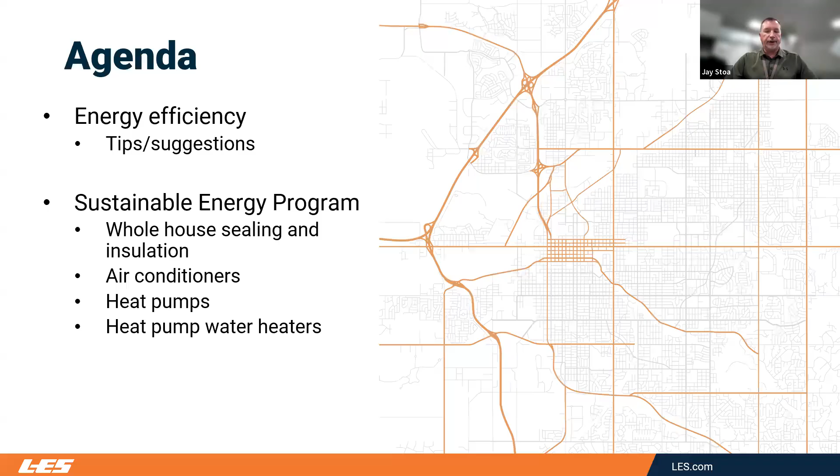Don't hesitate to ask questions as I'm going along here. We had a technology issue here, so I don't have all my notes. So hopefully I can, like we say, wing it.

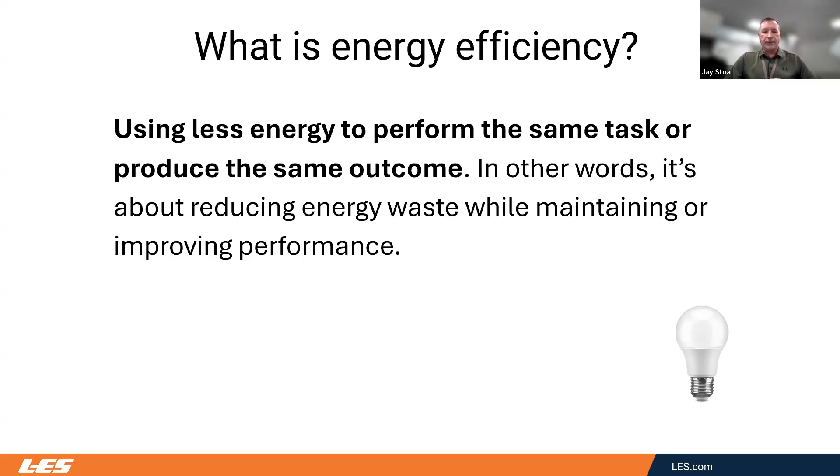So to start off, what is energy efficiency? If you use AI, this is what I got: using less energy to perform the same task or produce the same outcome. In other words, it's about reducing energy waste while maintaining or improving performance. And obviously, our sustainable energy program is going to improve some of those energy efficiencies, and you're going to get an incentive with that. So what I want to do is a quick rundown of things that I look for when I'm evaluating people's energy consumption.

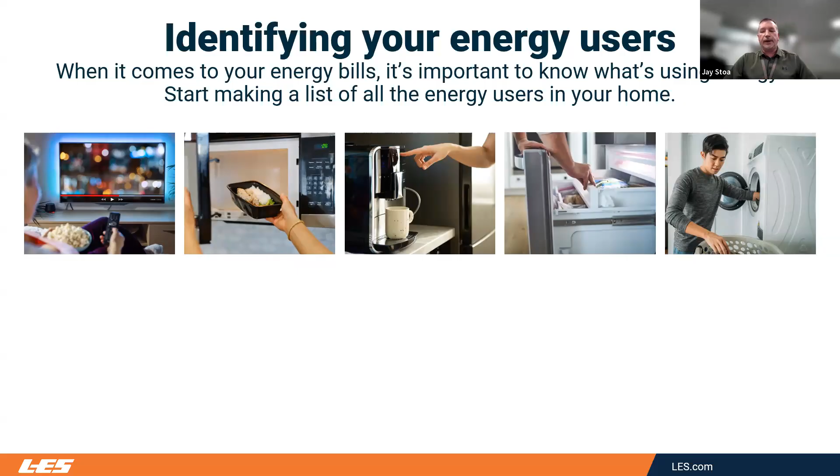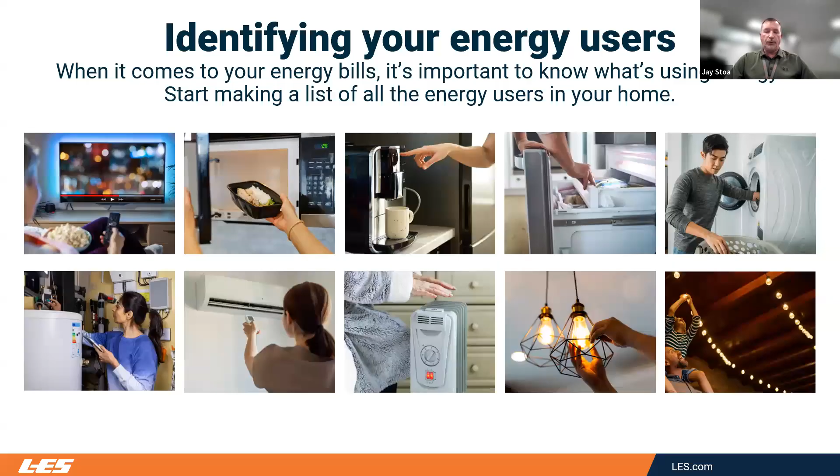So if you think about your home, you're going to have all of your plug loads, like your TVs, cable boxes, electronics, routers, your microwaves, even your task lighting. And then your appliances, refrigerators, freezers, clothes dryers, dishwashers, really everything that is using energy, your electric meter is going to be seeing it. And then, of course, you're going to have what I call your seasonal loads. Depending on if you heat with electric or, obviously, air conditioning, you're going to see that in your electric bill. And one thing I'm going to point out during this next slide is what we call seasonal plug loads.

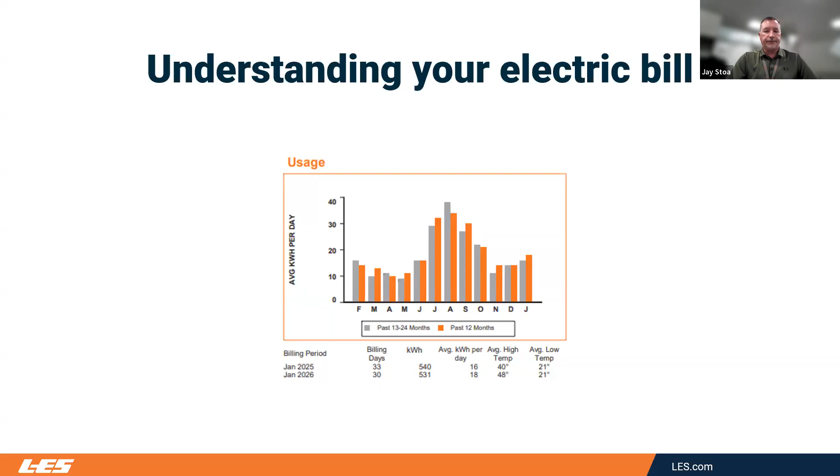So once again, what I want to look for is what I call base loading. That's going to be all your appliances, your lighting, and your plug loads. So in this graph, the months that show the lowest energy use are going to be April and May. So that's what I'm going to call the base loading for this particular customer.

And then once again, we have the seasonal. This customer has gas heat, so we're seeing that big increase during the summer months. And that's what I'm calling the seasonal increase during the summer months, because it's going to be air conditioning.

One thing that I do want to point out, this customer does work from home a couple of days out of the week. And instead of turning up their whole house thermostat to keep the space they're in warm, she will utilize a space heater. And that's the perfect way I think you should use space heaters. If you're just going to be occupying a room, rather than heating your whole home by raising the temperature, just lower the thermostat setting and utilize that space heater. And obviously, you want to shut it off when you're not in that space.

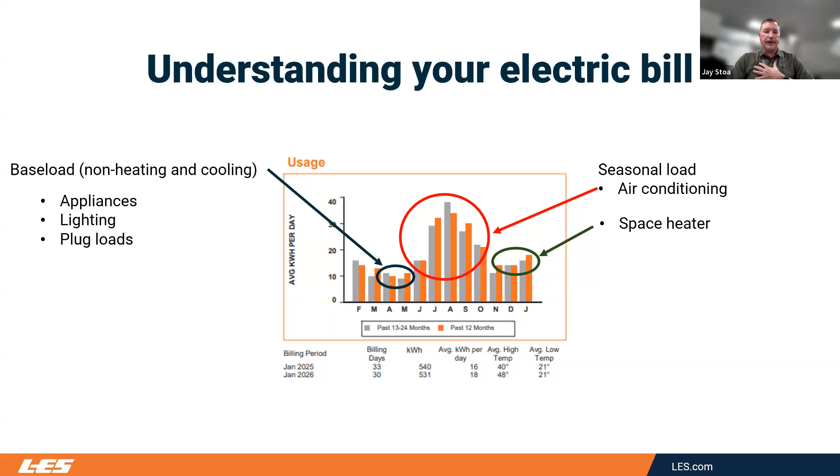These are just real quick things that people can do or should be starting to do. When we're talking about all of your interior lighting, you want to look at replacing your incandescents with LEDs. And you really want to start with the most used light fixtures. Obviously, LEDs are going to use 75 to 90% less energy than the incandescent.

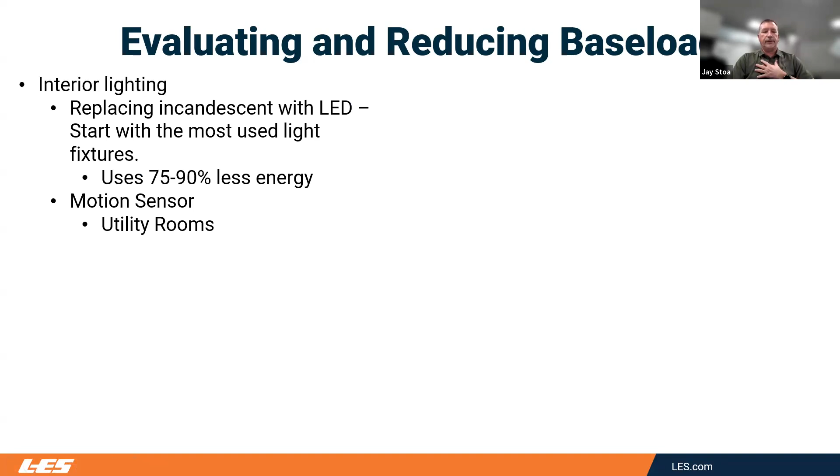Utilize motion sensors. Getting ready for this presentation, one area that I thought of where I don't have a motion sensor and it would make the most sense is in our utility room where our washer and dryer is. So that is something I'm going to be doing, utilizing a motion sensor. And then I do have one in my garage, which is great because sometimes if you go out there, turn the light on, then you forget about it. And then it's 12 hours later that the lights are on.

Earlier this month, my granddaughter had a birthday and it was down in my daughter's and son-in-law's basement. And I noticed that they have ten 75-watt recessed light fixtures. Talking to them, they're telling me they do utilize the basement a lot and it's on about 2 hours a day. So if you add up all of that energy, it's going to consume 550 kilowatt hours per year.

And Caitlin, can you help me? The pictures, what's the dollar amount? I apologize. It says 35. I don't have my notes with me. So basically, those light fixtures are going to cost $35 a year just to light the basement.

So replacing with LED, you can utilize an 11 watt LED bulb. And that's going to drop the energy down to 88 kilowatt hours per year. And then I don't see the dollar amount. And that one's $6. Thank you. And I apologize, I'm not able to see my notes. So basically, if you were to replace those 10 fixtures, you're going to save about $29 per year.

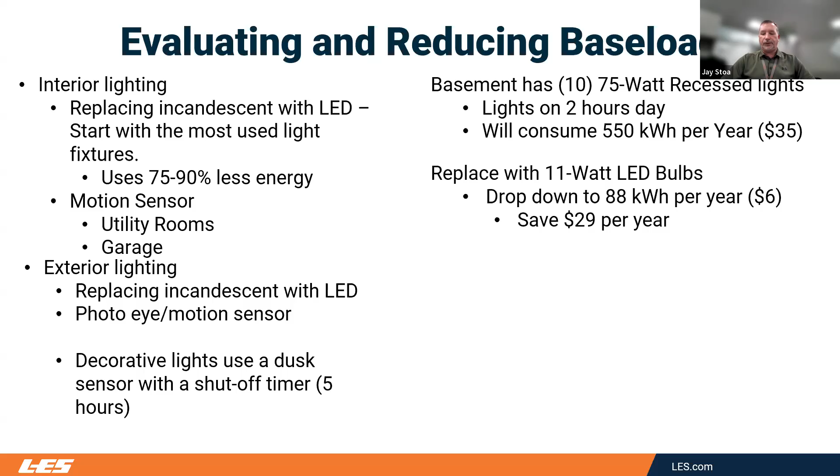On exterior lighting, once again, replace incandescents with LEDs, utilize photo eyes or motion sensors. On our deck, we have decorative lighting, but I am using a dusk sensor. So once the sun goes down, the lights will turn on and they will shut off after 5 hours. If you drive around town, sometimes you see all these decorative lights that are on almost 24 hours a day. So use the technology if it's there to save energy.

Any questions on that? Don't see any popping up so far.

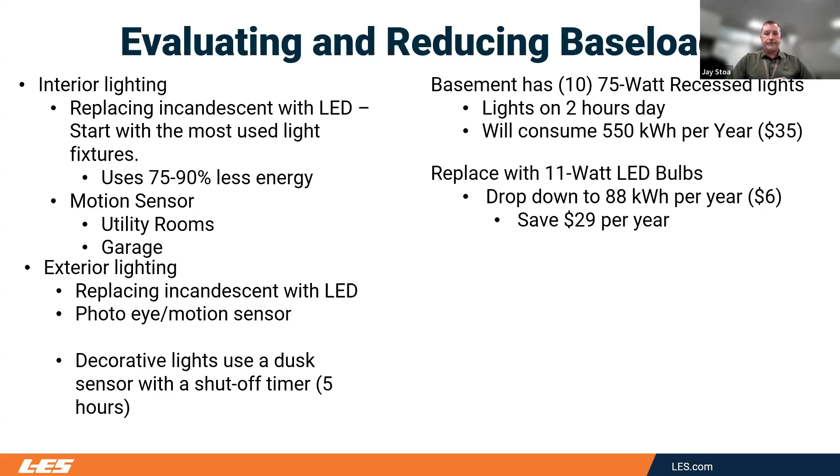So on your plug loads, there's one thing that you can utilize, which I think is a great tool. You can plug in any of your plug-in devices to monitor how much energy it's using. So this is at my home. I have an older 20 cubic foot freezer, it's almost 30 years old, and I'm having to defrost it about 4 times a year. So what I want to show here is when the compressor's running, if you can see the image on the screen, the compressor's using about 183 watts.

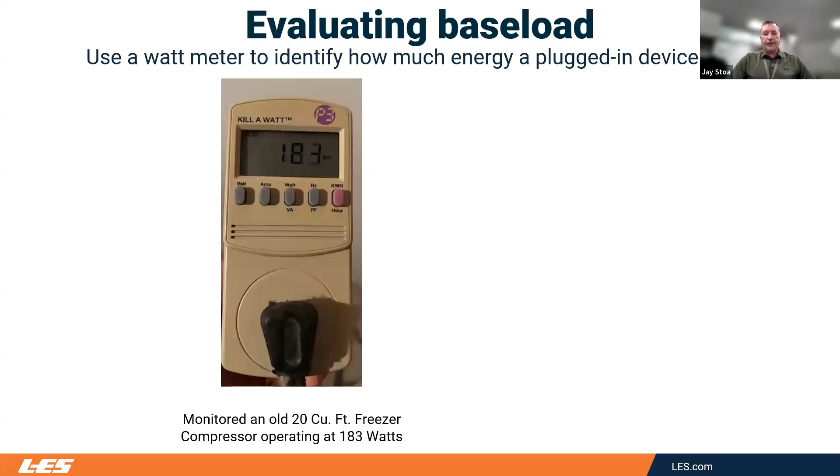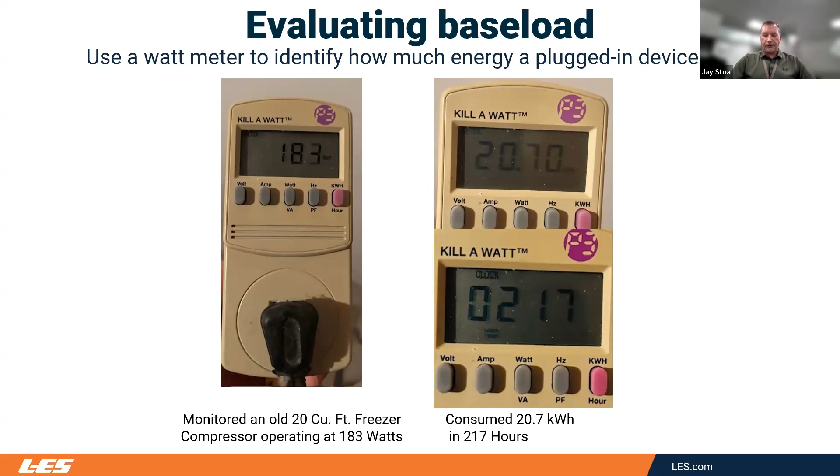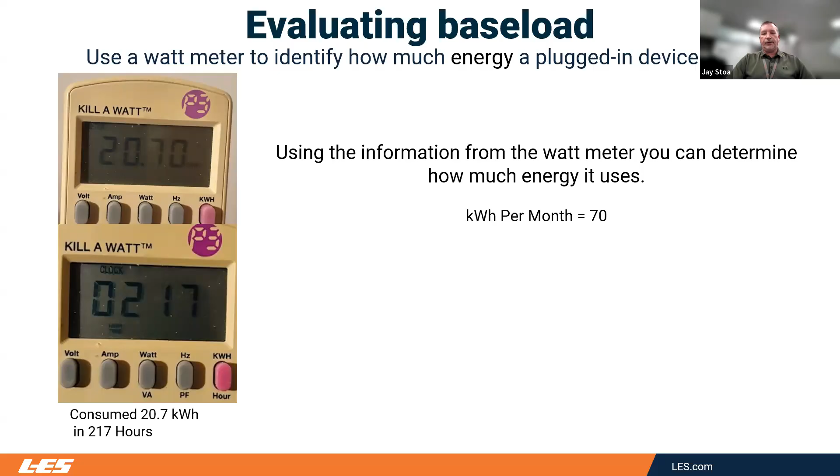For the purpose of getting this presentation in, I only monitored it for about 9 days, or 217 hours. But in those 9 days, it used 20.7 kilowatt hours. So with that, I'm able to estimate how much energy it is using per month. The freezer itself is going to use about 70 kilowatt hours per month. Per year, we're looking at about 840 kilowatt hours.

And then if you multiply that by our energy rate of 6.3 cents, it's costing me about $53 a year. One thing that I do want to note, with the 6.3 cents, we do have a winter rate and a summer rate. So that's a combination, the average rate for the whole year.

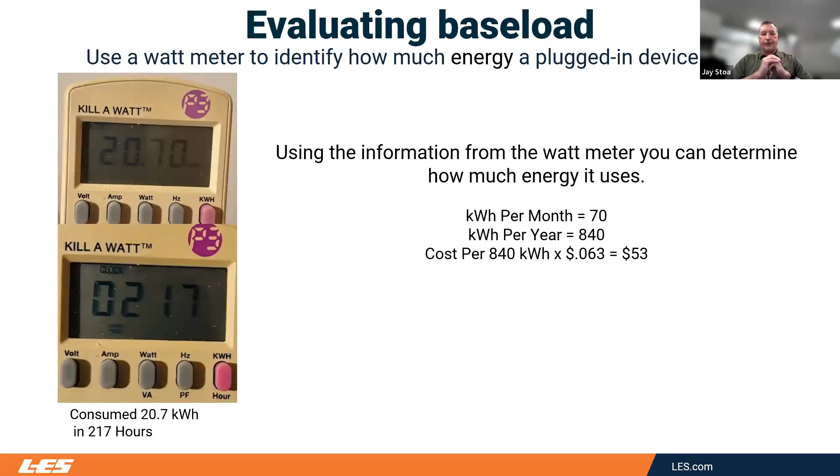So what do we look for when I'm replacing any appliance or freezer, refrigerator? Most likely, you're going to have an EnergyGuide when you go to these stores to purchase new equipment. So this particular freezer that I would look at to replace mine is going to use 438 kilowatt hours per year. And you want to look for the Energy Star label. Basically, that is telling us that it is the most energy efficient freezer out there.

And if you look at it, it tells you what the lowest kilowatt hour is to the highest kilowatt hours. And obviously, the Energy Star is going to be the most energy efficient. So, with the data that I got from the watt meter, I can estimate what I'm going to save per year. So basically, replacing my old freezer with a newer one, I'm going to save about $25 per year.

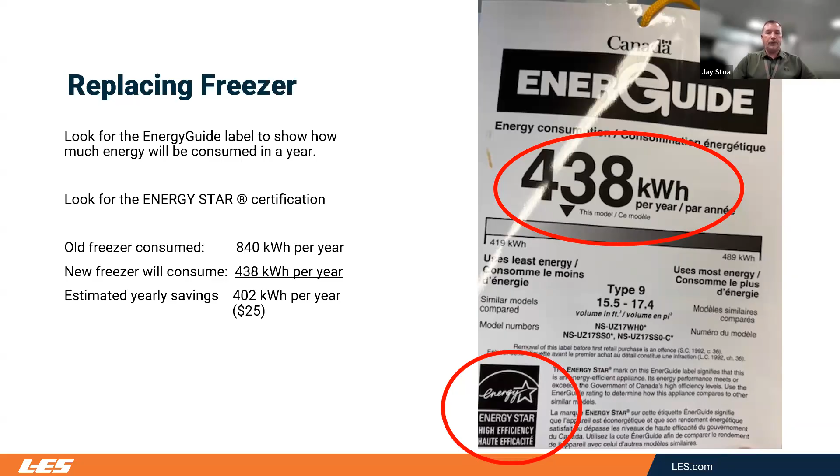And excuse me. So $25 per year, and hopefully I won't have to keep doing a defrost on a quarterly basis. Okay, now I'm going to get into the sustainable energy program. Were there any questions about the information that I just went over?

We do have one question that just popped up, and they said that they use their dishwasher, washer, and dryer in off-peak hours during the day on weekdays. Does that help save electricity? So if we had time of day rates or energy use, using it on an off-peak day or time, but the energy cost is going to be no different than when you would normally use those.

In the heat of the summer, it would probably be best not to use those devices that are using and creating a lot of heat, especially during the day, because your air conditioner has to remove that heat. That would probably be my only recommendation if and when you use those heat appliances like an oven and stuff too during the peak of a really hot summer day.

All right. So our sustainable energy program, I'm going to see if I can minimize. There we go. Move it. Okay. Sorry for the technical issues here.

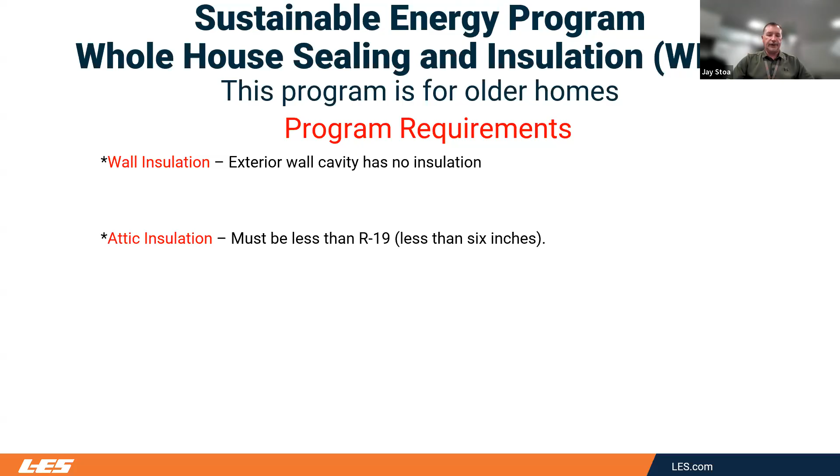We do require that the home have a pre and post blower door test. And basically, this is a measure of how leaky your home is and then how much it is improved after you get insulation levels up to snuff. So on the exterior wall insulation, the contractor is going to get that wall cavity up to at least an R13. And then our incentive is 80 cents per square foot of frame wall area.

And then for adding attic insulation, it's going to bring up the R value to an R49. And then our incentive is 50 cents per square foot of attic space. And I will say it's just conditioned space. If you have a garage and you're going to add insulation to the garage, that would not qualify. Was there a question?

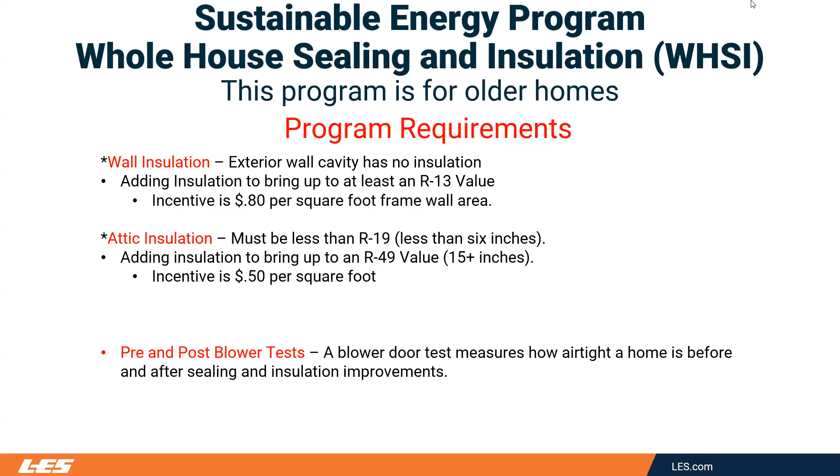Let's see. Somebody was just saying that they've used the LES energy program before and they loved it. Oh, thank you. Well, I'm sorry. I just didn't know if it was a question about what I went over.

So with both of these criteria, if you have that older home, the walls are not insulated and you have minimal attic insulation, you can choose one or the other or do both. So you do have an option. In previous years, if you had that type of home, we made you do both to qualify for our program. Here you can just possibly do the attic insulation if you want. We do have a cap that the total incentive cannot exceed $1,500, or 50% of the total cost of the project. All right.

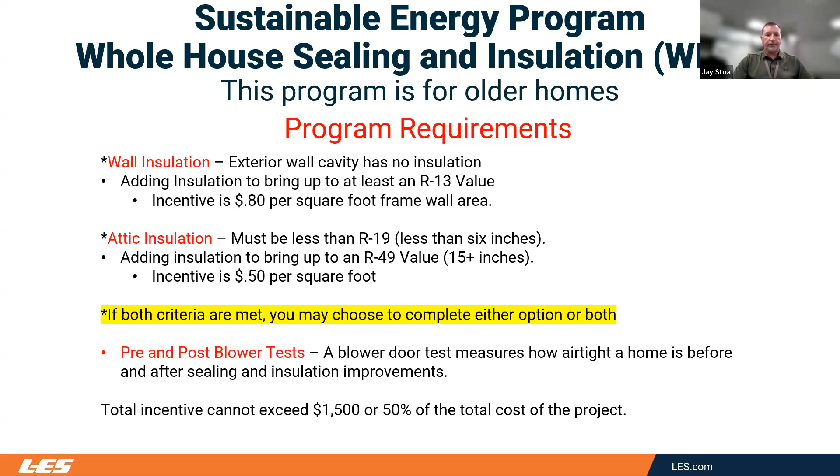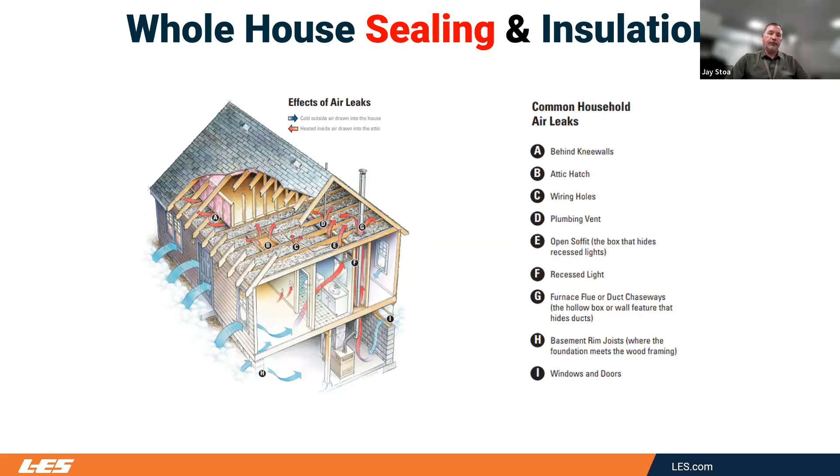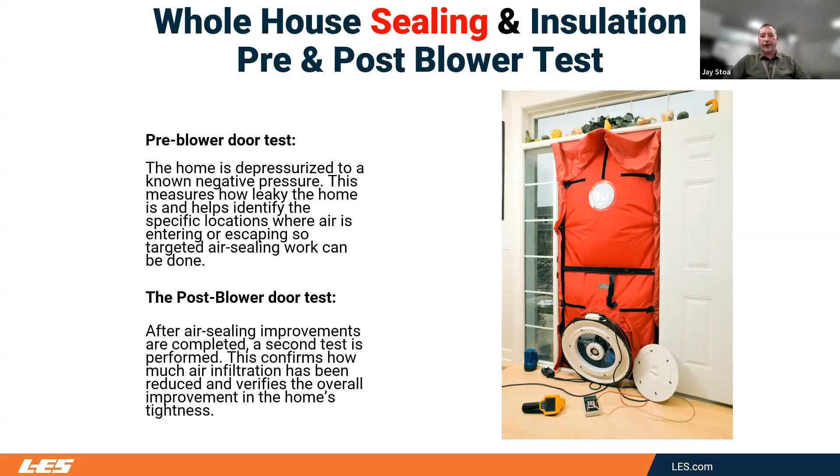And then basically the post blower door test is just going to be able to show us how much that has improved after insulating and sealing up the home. And these are the measurements that the contractors will give us so we can document it and quantify how much the improvement was on sealing up your home.

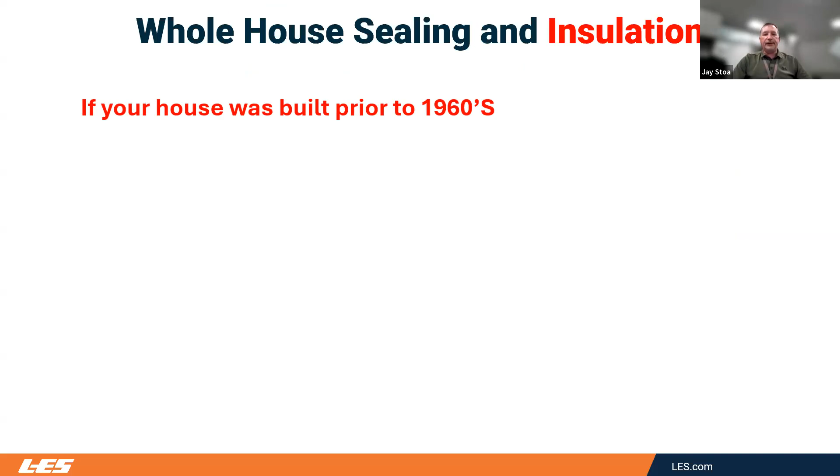So if your home was built prior to the 1960s, this is a test that you can do to see if you can determine if the exterior wall cavity has no insulation. So I call it the outlet inspection method. When I go to homes, this is what I do to see if the walls are insulated or not.

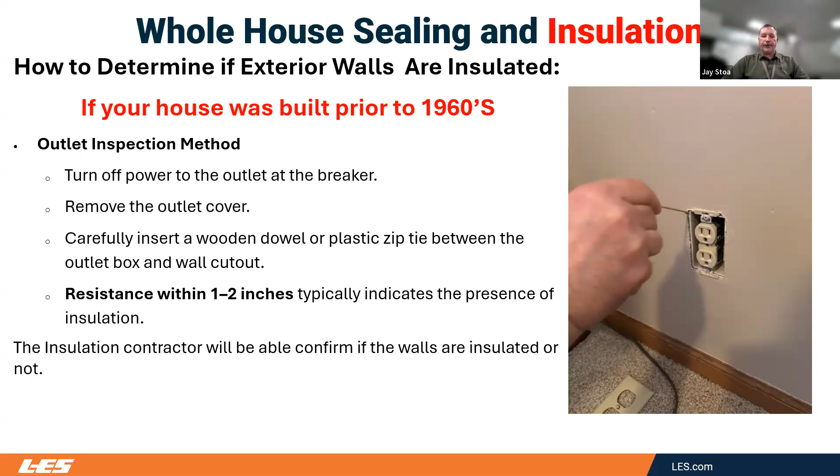So obviously you want to turn off power to the outlet at the breaker, remove the outlet cover, and then just use a wooden dowel, or what we're saying here is maybe even a plastic zip tie. And then you just want to feel around the outlet box in the wall cutout. And what you're doing is if you feel any resistance, that's probably telling you that there's insulation there. And then if you can move around and not feel anything, most likely the walls are not insulated. But obviously, the insulation contractor will confirm that for you too.

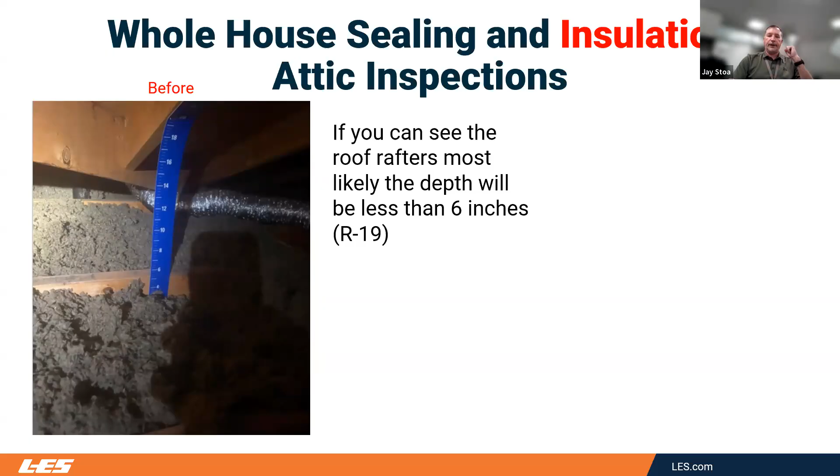All right. Attic inspection. If you can see your roof rafters, most likely the depth will be less than that 6 inches, or what we call that R19 value. And so adding insulation to the attic would qualify for our program. And then after they add the insulation, and when they're sealing the attic penetrations, if you think of any of your light fixtures, recessed lights are notoriously real leaky. They will address that, tightening up those fixtures before they add the insulation.

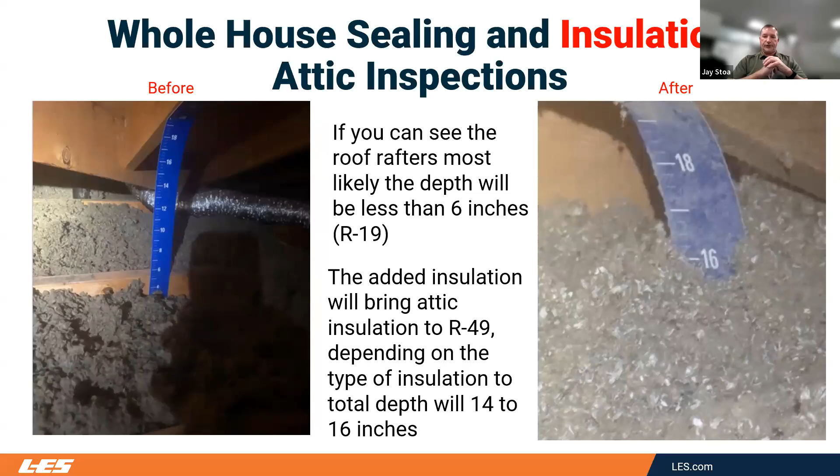When we talk about heating and cooling your home, when a furnace is sized for a home, it needs to be able to overcome basically a 75 degree temperature difference from inside to outside. And then during the cooling, it's only a 20 degree difference. So that's why if you're looking at the values of the heating or the cooling that is needed, you don't need as much energy to cool the home.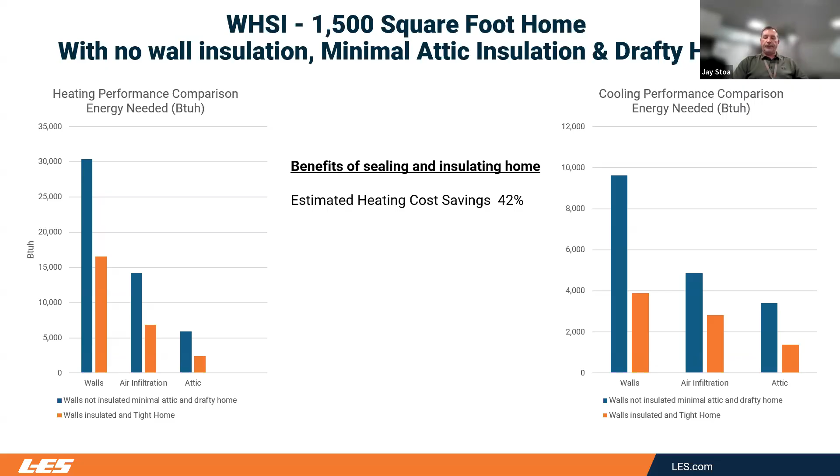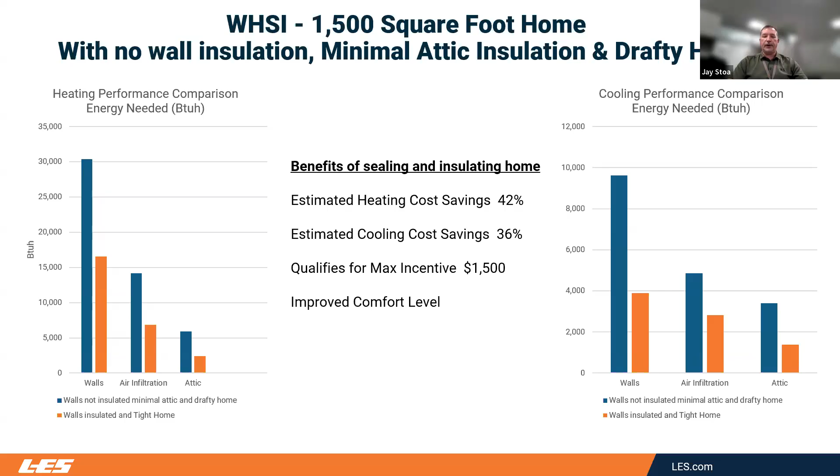Benefits of sealing and insulating your home. Just by insulating your home, reducing some of that air infiltration, it's estimated you can save 42% on your heating cost, 36% on your cooling cost. And so this particular home, since they did both the walls and the attic, it's going to qualify for the max of $1,500. And obviously it's going to improve the comfort level of the home.

You'll note that adding that additional attic insulation doesn't make a huge impact, but improving the tightness of the home definitely will. Because if you think about the summer months, not only are you bringing in hotter air, but you're also bringing in moisture that the air conditioner has to remove. So that's why there's a greater impact by tightening up the home.

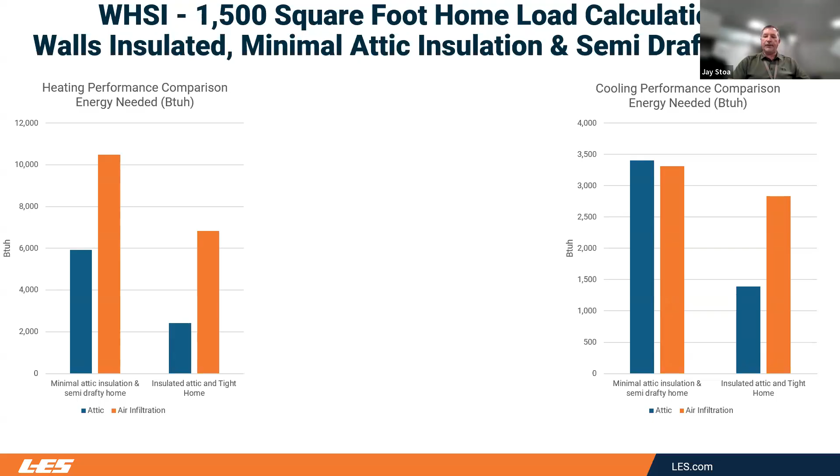So just by adding the attic insulation and sealing it up, we're going to save about 18% on heating, 15% on cooling, and then a 1,500 square foot attic space is going to qualify for a $750 LES incentive. And obviously, we're going to improve some of that comfort level.

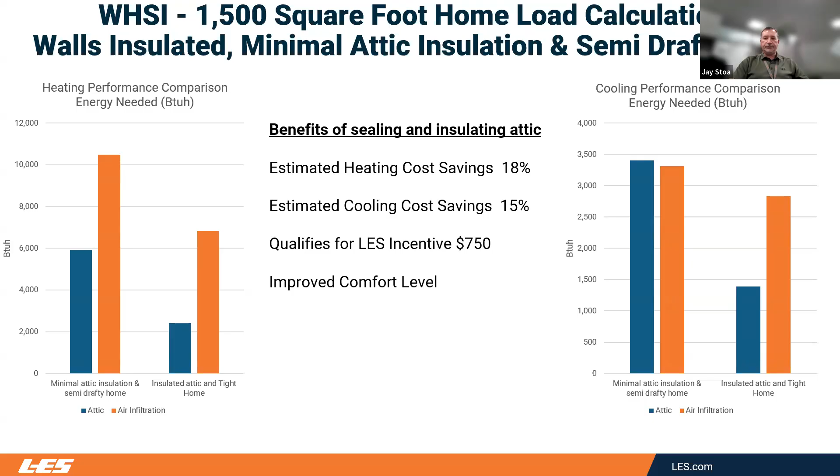Any questions about whole house sealing and insulation? Yeah, we got one question here. They said, "What do you do with older homes that have knob and tube wiring in the attic? I have heard some people say that it's a fire hazard to put insulation up in the attic around knob and tube." Yeah, that is a true statement.

Ideally, you want to upgrade that wiring up there. I actually think the city will not allow you to add insulation in the attic if it's going to impede that knob and tube wiring, unfortunately. But if it's a leaky attic, that's stuff you can do without adding the insulation, though, too.

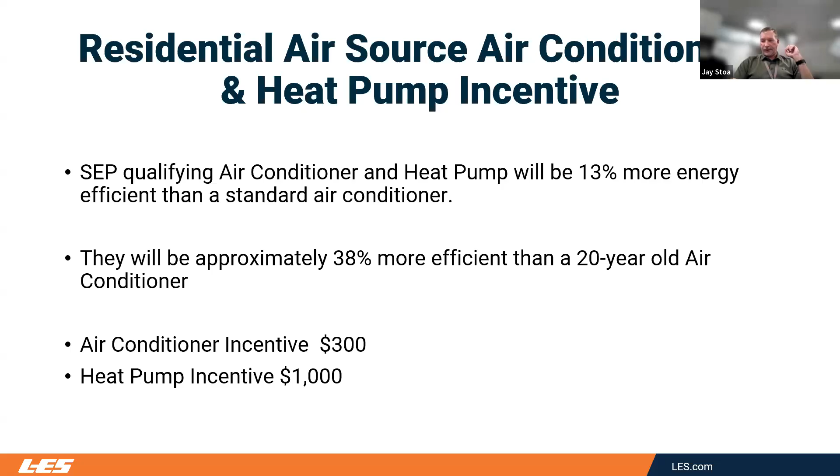So now we're going to move on to our air conditioner and heat pump incentives. So basically, a qualifying air conditioner and heat pump is going to be 13% more energy efficient than a standard air conditioner. Let's say you have a 20-year-old air conditioner. By installing a qualifying system, it's going to be 38% more energy efficient. Air conditioner, the incentive is only going to be $300, but a heat pump is going to qualify for a $1,000 incentive.

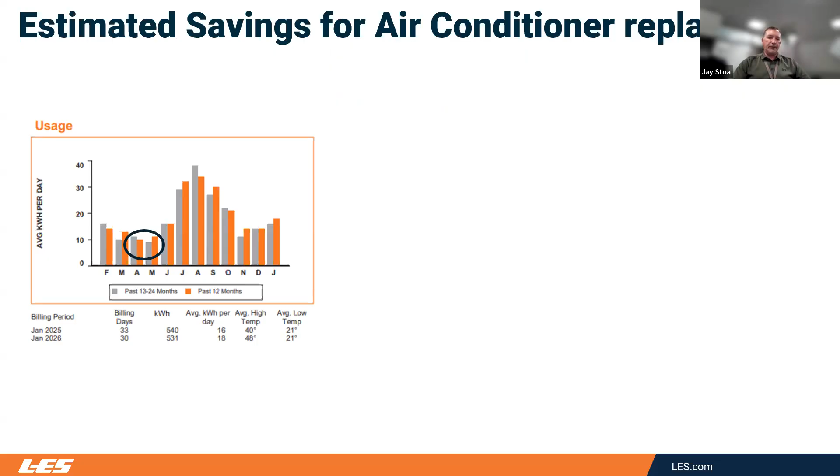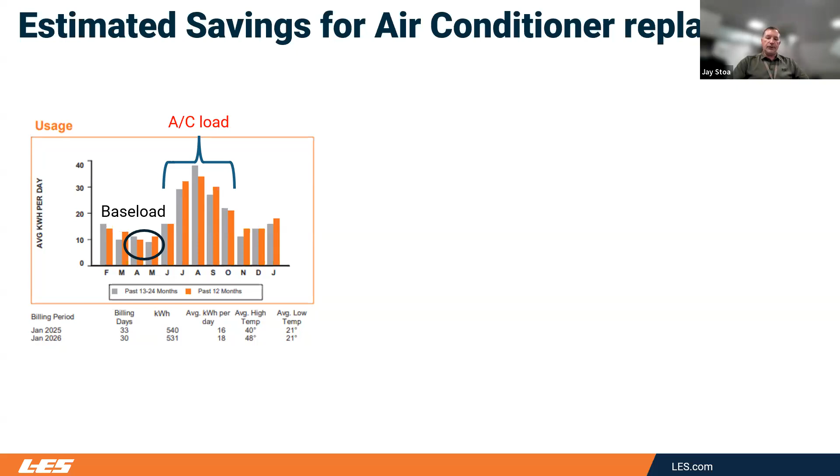I'm going to go back to the graph that I showed earlier because I want to show you how you can estimate what the savings will be by replacing your air conditioner. So once again, we have our base load. And if you remember, I said there's about 5 months where the air conditioner was used in this home. So what you want to do is accumulate the total energy used in those 5 months. So this particular home, they use 4,028 kilowatt hours.

And so what I'm doing is I'm subtracting the base load for that 5 months. And by subtracting that, I can determine how much energy the air conditioning used just to cool that home during the summer months. So you can see 2,780 kilowatt hours. So it costs this homeowner about $217 to cool their home.

When we talk about energy efficiencies for air conditioners, they're rated in SEER2. SEER, that's seasonal energy efficiency ratio. And so the higher the number, the more energy efficient the system is. So a 20-year-old air conditioner, I estimated at 11 SEER2. And for a qualifying air conditioner, we ask for two energy ratings, and it's a 12 EER and then a 15.2 SEER2 rating.

And the one thing about the EER rating, that's how the unit is going to perform at the hottest day of the year. So basically, when it's at 95 degrees, it's not going to be as energy efficient as the seasonal rating, but that EER is telling us how it's performing on the hottest day of the year.

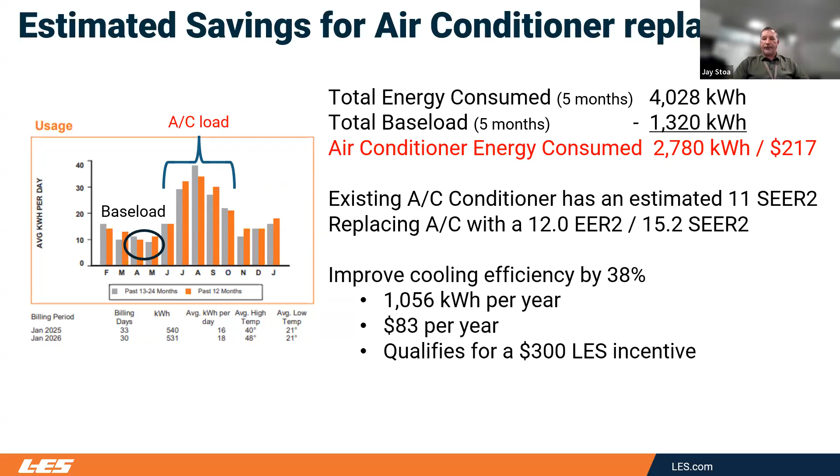So basically, once again, we're improving cooling efficiency by 38% or 1,056 kilowatt hours per year, so replacing the air conditioner is going to save about $83 per year. And that does qualify for a $300 LES incentive.

All right. I'm not sure if everybody's familiar with how a heat pump works. So during the summer months, the air source heat pump is going to work exactly like what an air conditioner does. During the refrigeration cycle, it's transferring the heat from the indoors to the outdoors. If you ever walk by an air conditioner on a hot day and put your hand above where the air is blowing out, it's going to be hotter than the surrounding air. So it's removing the heat from the home to cool your home, if that makes any sense.

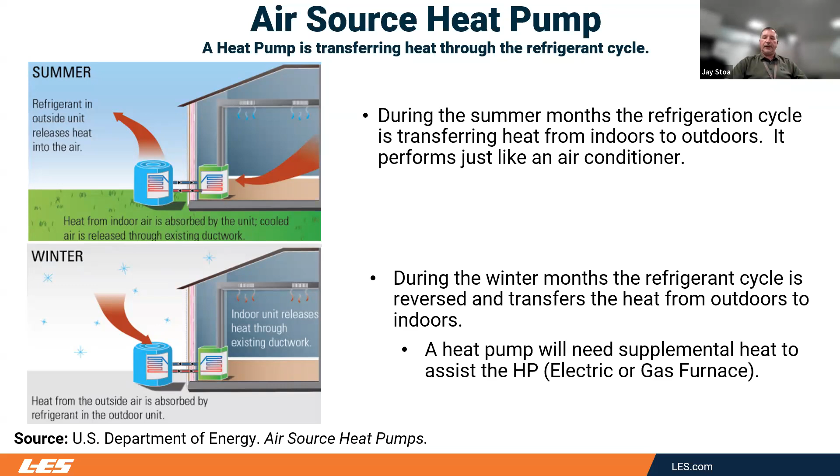Now, during the winter months, the refrigerant cycle is reversed. So basically, it's transferring the heat from the outdoors to the indoors. One thing a heat pump is going to need is supplemental heat to assist the heat pump, because the colder it gets, you just don't have as much heating capacity. So you do need supplemental heat, and that can be an electric furnace or a gas furnace.

So what I want to try to show here is the home that we insulated earlier during the presentation. Every home, when the heating and cooling system is sized, it's going to be based off of the heat loss and heat gain. So the home that we insulated earlier through the whole house sealing and insulation program, the heat loss, all of the operational costs are based off of these loads.

So if you have an existing system, an electric furnace with just an air conditioner, I've broken out the heating and cooling costs. So you can see that if it's just an electric furnace, it's almost going to use 11,000 kilowatt hours, or it's going to cost the homeowner $616 to heat. And then a standard air conditioner is going to be right about $105.

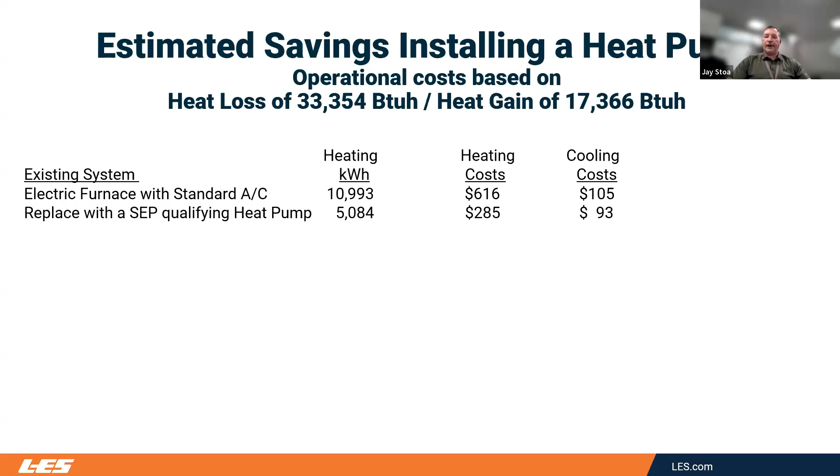Installing an SEP qualifying heat pump, the energy use is going to drop down by well over half. So the heating cost drops down to 285, and then the cooling cost down to $93. So it's going to save about $343 per year. And then this will qualify for $1,000 LES incentive.

Now, I had mentioned earlier, you can install a heat pump with a natural gas furnace. So in this scenario, a gas furnace is going to use about 469 therms, costing about $352 to heat the home. If you add a heat pump, we're going to offset some of that heating therms and then add some kilowatt hours for the heat pump to operate. So the heating cost drops down to 294 and cooling is at 93.

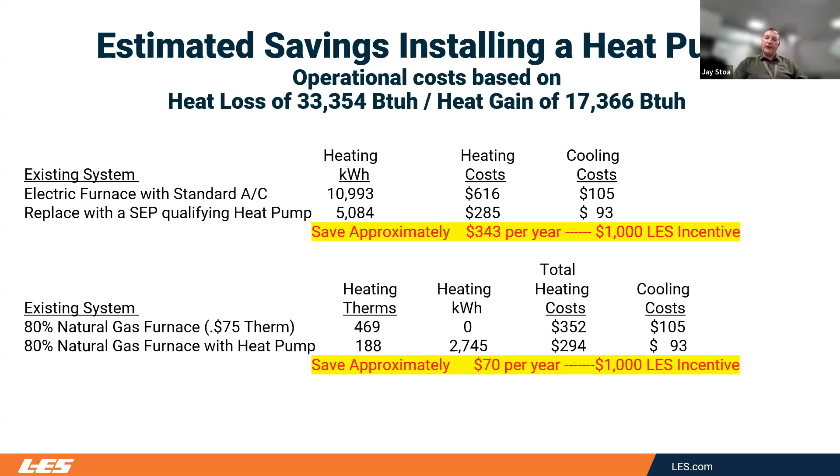Excuse me. And then you're not going to see as big of energy savings with a gas furnace and heat pump. So it's only going to be about $70 per year, but it still does qualify for that $1,000 LES incentive.

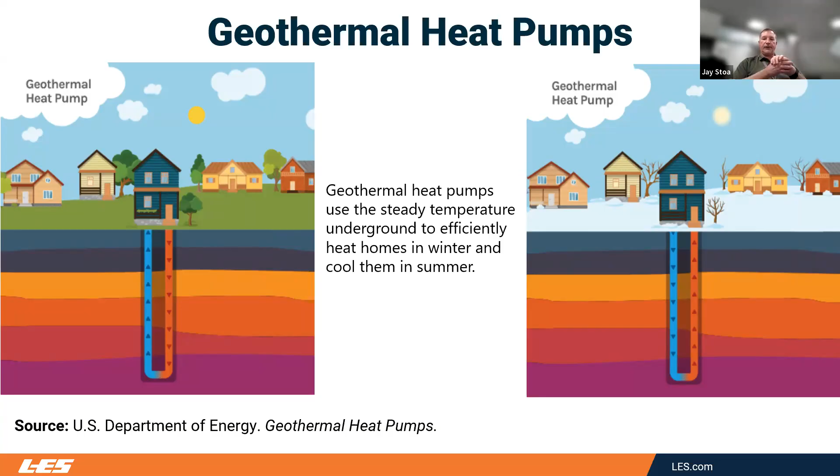Then we do have an incentive for geothermal heat pumps. So basically, if you think about the air source heat pump, it's transferring heat of the surrounding air. Geothermals are going to be a lot more energy efficient because it's using the ground source where it's going to be more of a constant temperature.

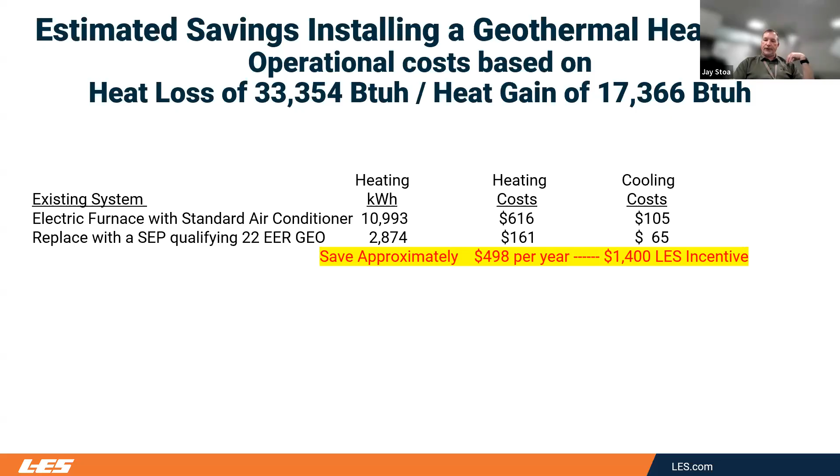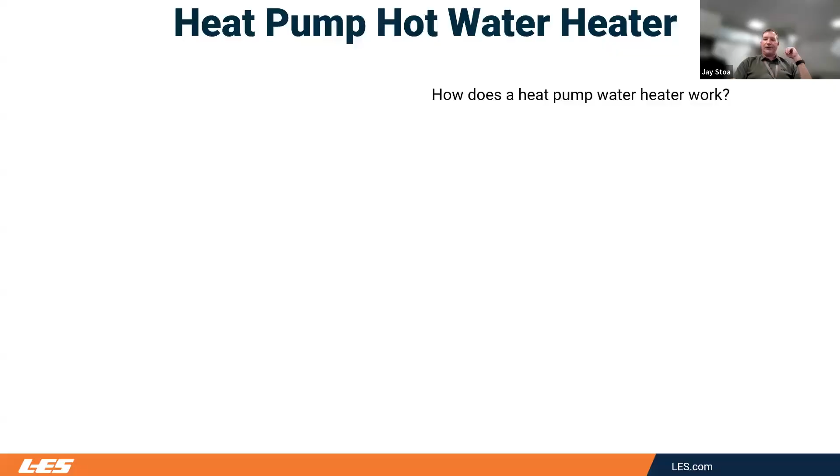All right, now the final one. My voice is starting to go out, so I do apologize.

Heat pump water heater. So I don't know if you guys can see my mouse here, but an electric water heater is going to kind of resemble the tank here, but the heat pump water heater is going to have a heat pump on top of it. So how the heat pump works, it's going to pull heat from the surrounding air, and then the compressor and the refrigerant is going to absorb that heat, and then the hot refrigerant heat is going to heat the water.

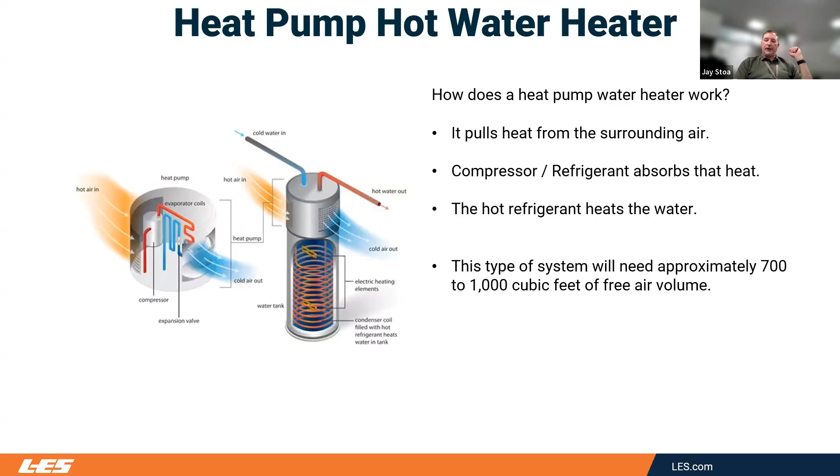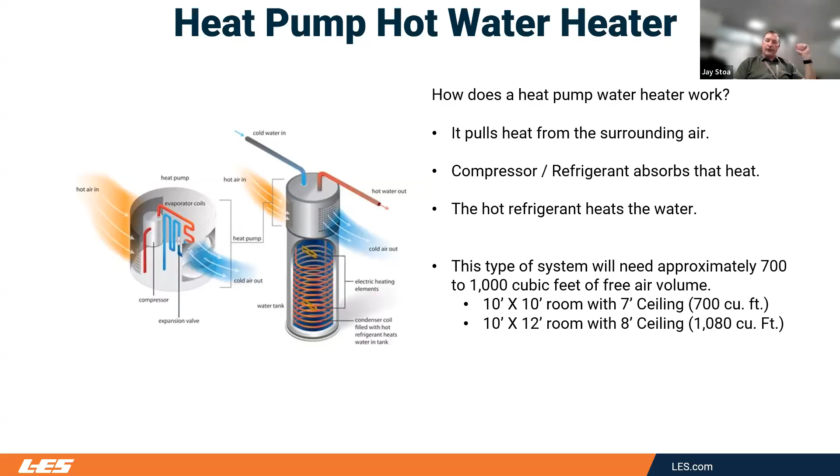One thing that I do want to point out on a heat pump water heater, it needs to be in a room that we can have anywhere between 700 and 1,000 cubic feet of free air volume. So basically, if you have a 10 by 10 room with a 7-foot ceiling, you're going to have 700 cubic feet of air to be able to move for the heat pump to operate properly. And then a 10 by 12-foot room with an 8-foot ceiling is going to give you a little over 1,000 cubic feet of air volume.

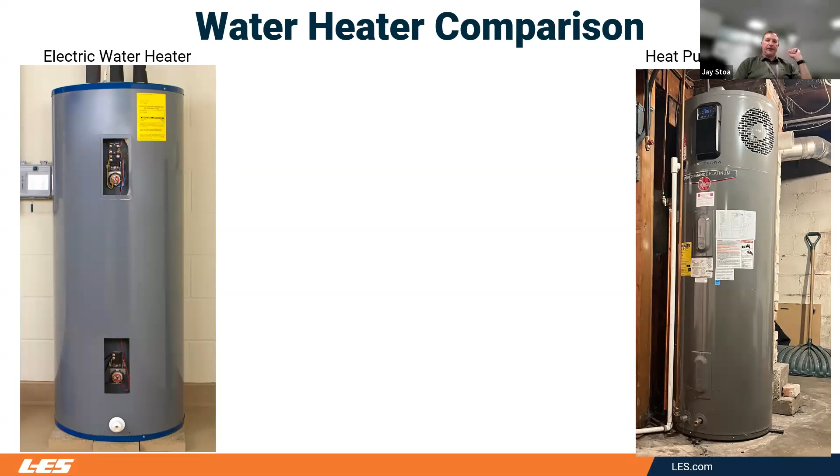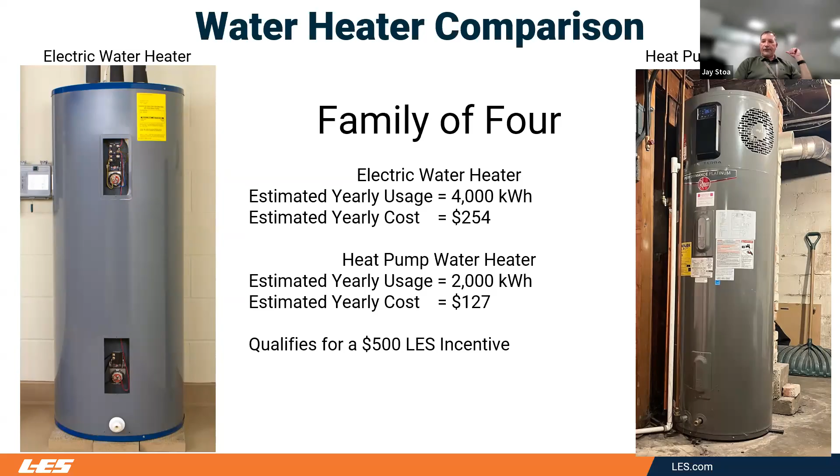All right. So if you have a family of four, and if you have an electric water heater, you're going to use approximately 4,000 kilowatt hours per year to heat the water. And it's going to cost about $250 to heat the water with an electric water heater. A heat pump water heater is going to reduce that down by at least half, dropping it down to $127 to heat the water. So you're looking at right at $127. And that does qualify for a $500 LES incentive.